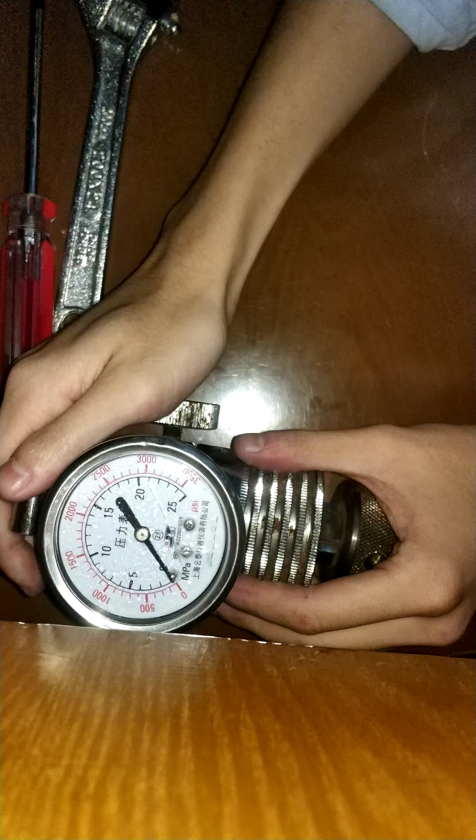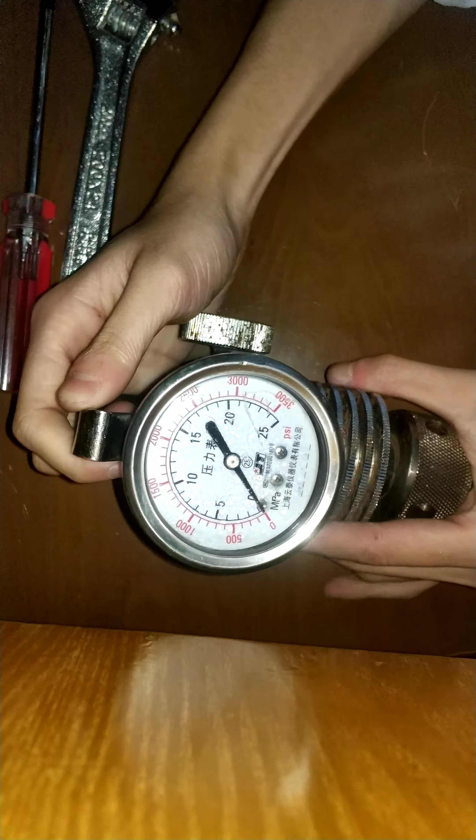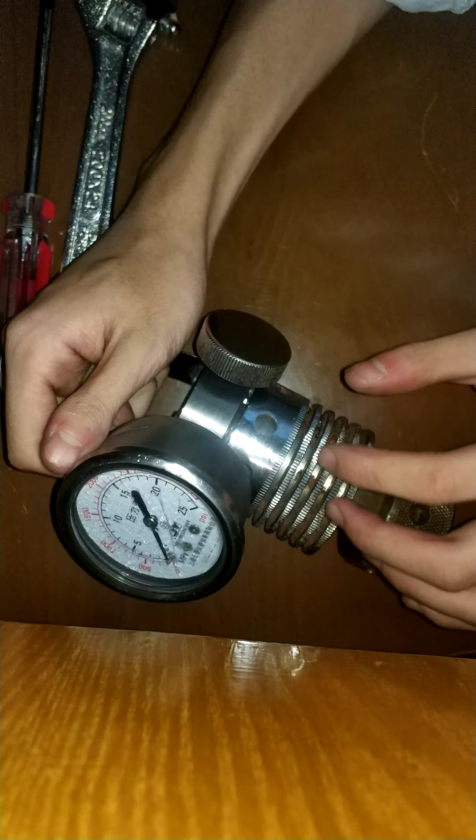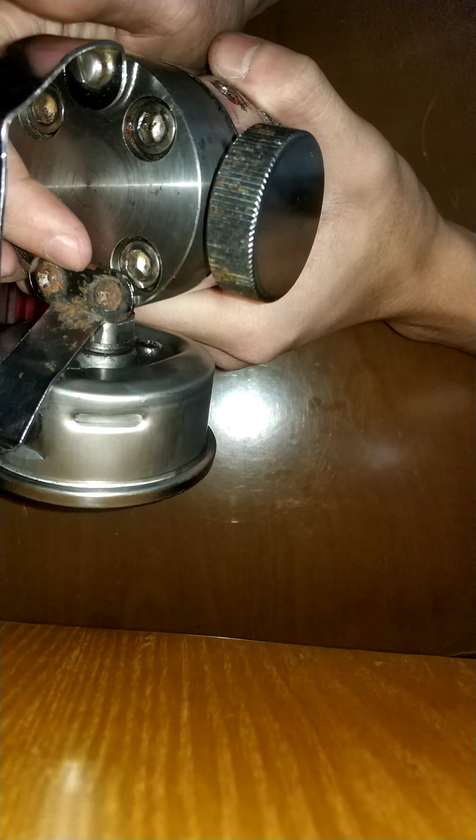First of all, please allow me to give you a brief introduction about this pressure gauge. As you can see, here is the lock nut, here is the gauge body. Inside this block, there is a non-return valve, but due to these two rusted screws, I may not be able to open this block to show you the non-return valve inside.

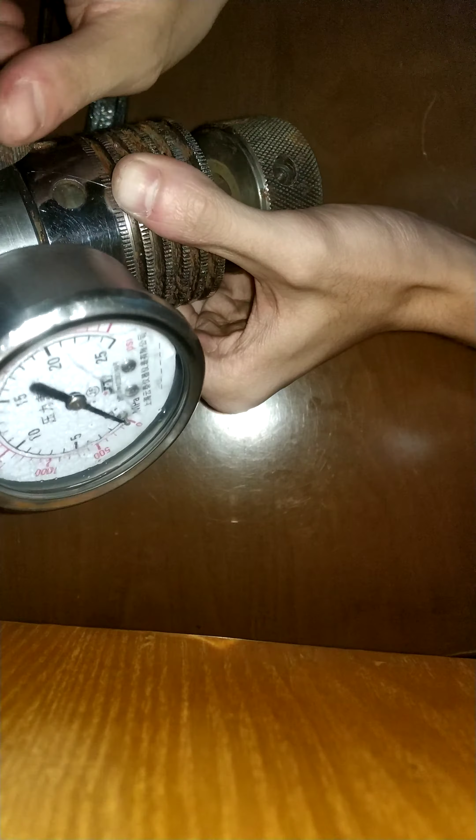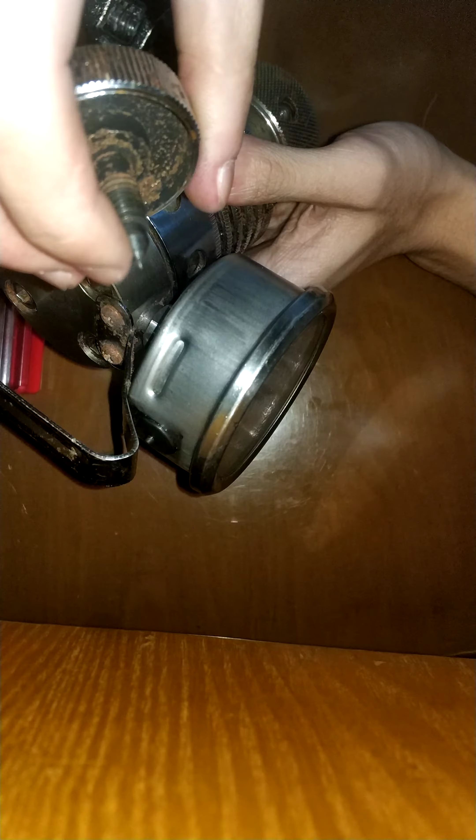This one is a needle valve. It can be dismounted from the main body. I will show you that. You see, here is a valve needle. And this one here is covered with carbon deposits. Here you see there is a hole in it.

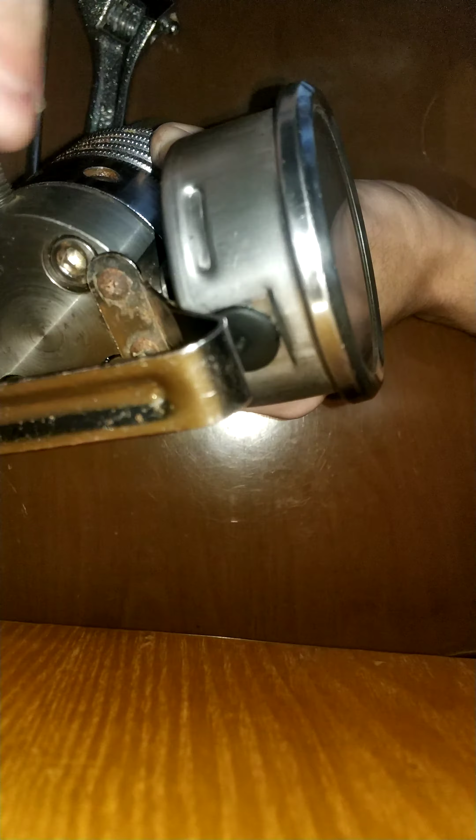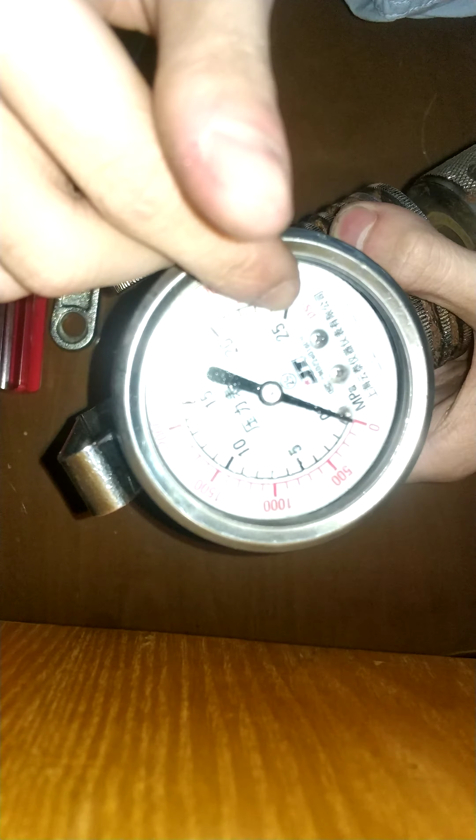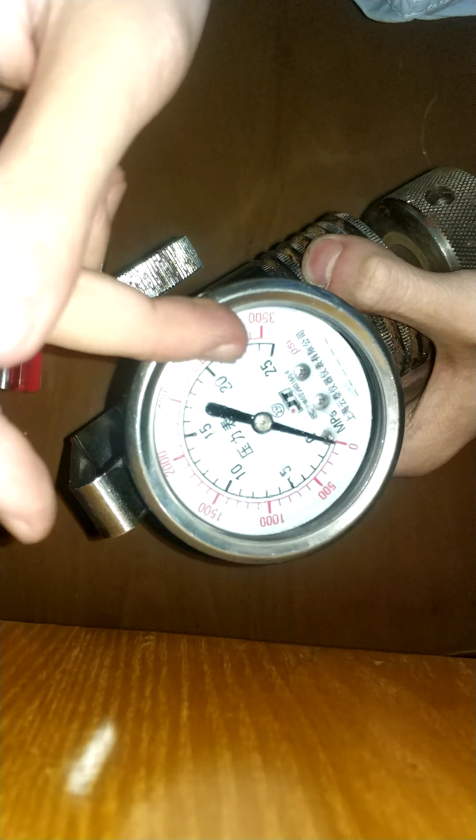The last thing is this high pressure gauge. As you can see, the maximum pressure is here, 25 megapascal. It equals 250 kilograms on a 1 square centimeter area.

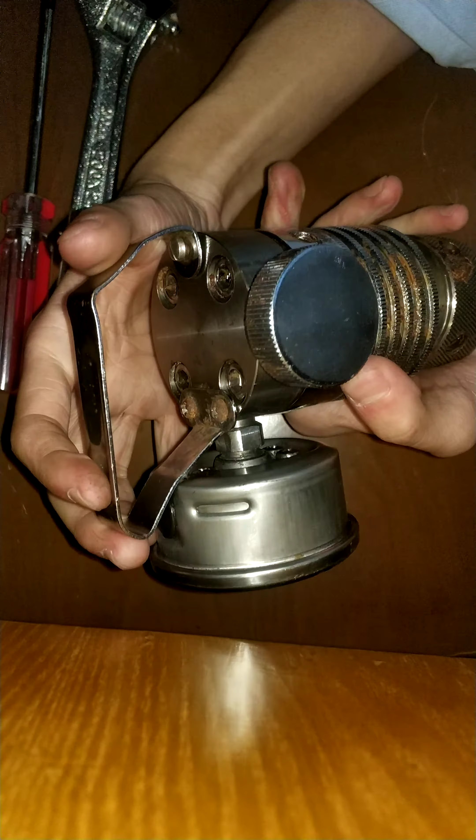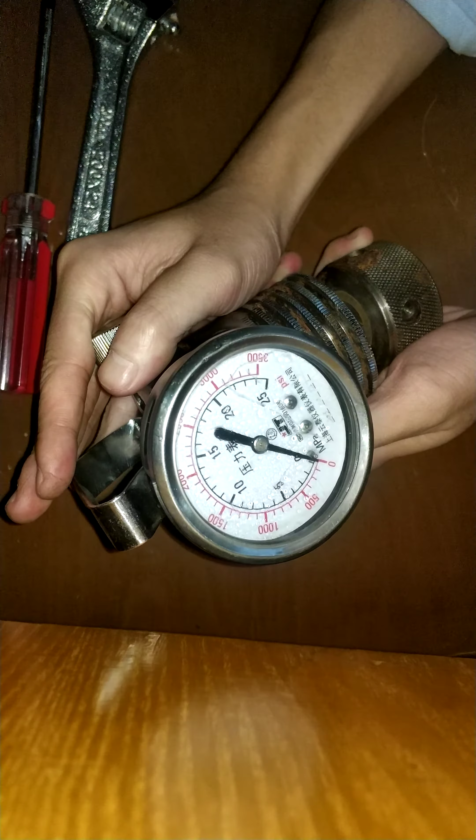So you may be curious about this gauge. What is it used for? It is used to measure the ignition pressure or compression pressure on a marine diesel engine, mostly the main engine. The marine diesel main engines are different from other diesel engines which drive lorries or tractors.

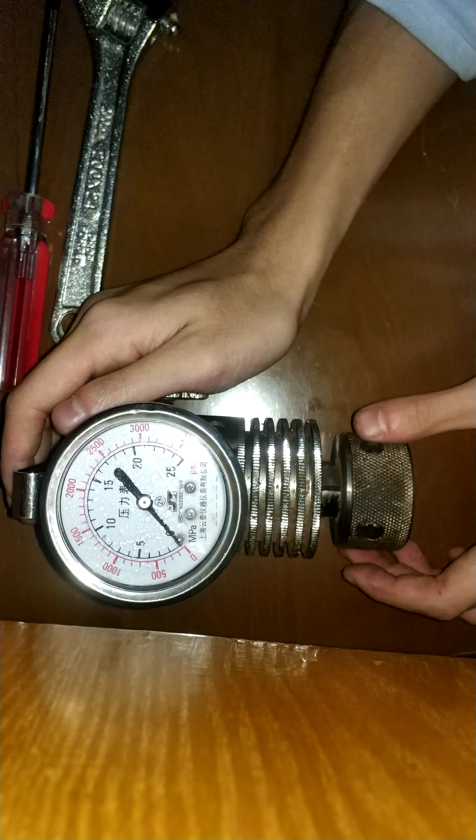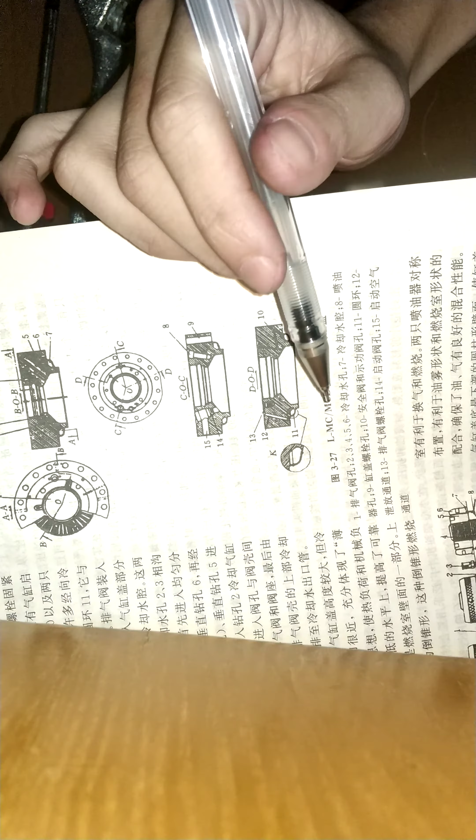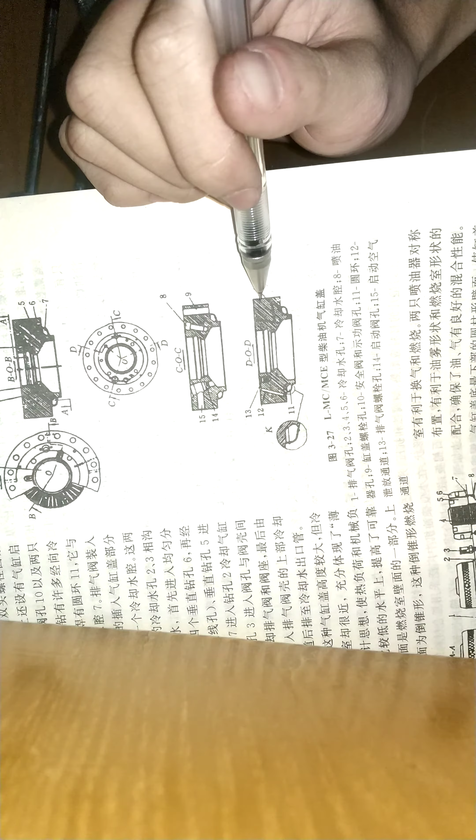On their cylinder heads, they usually have an indicator valve and an indicator cock. I will show you it. You see here, these are all in Chinese, so I will translate it for you. Number 10. Safety valve and indicator valve. Safety valve and indicator valve are usually mounted on a single block, and the block is mounted here.

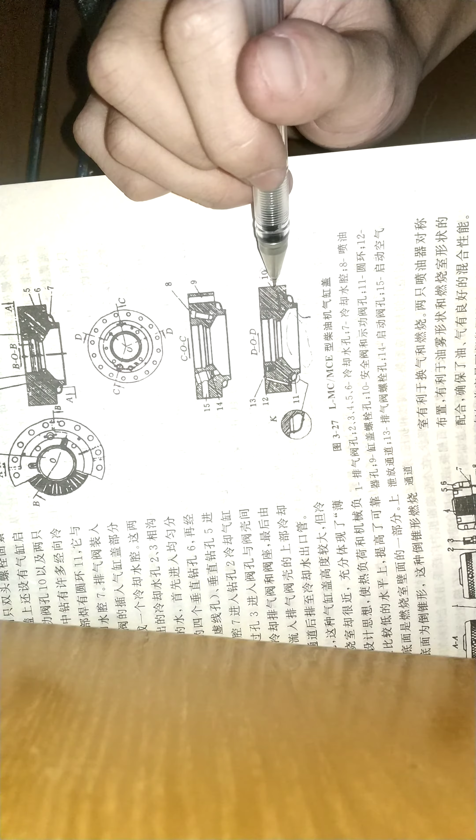Here is a combustion chamber, so the high pressure gas can go through this channel to the indicator valve and indicator cock. When measuring the pressure, we should do the following things. First, open the indicator valve to blow off the carbon deposits inside the gas channel and the indicator cock. Then close the indicator valve.

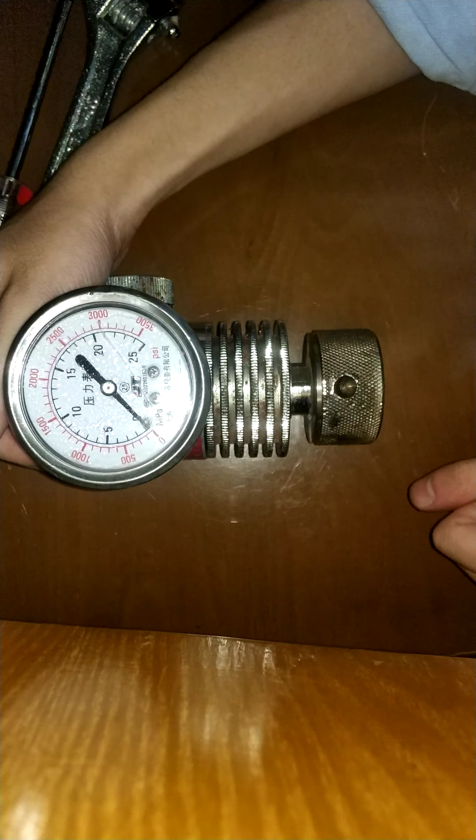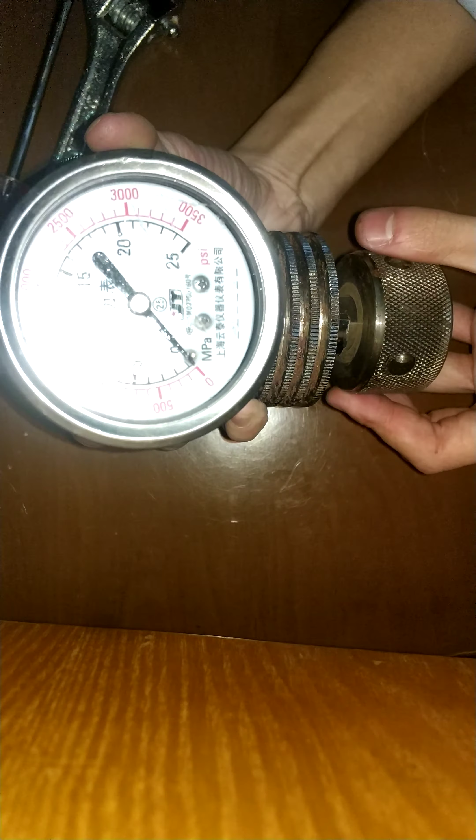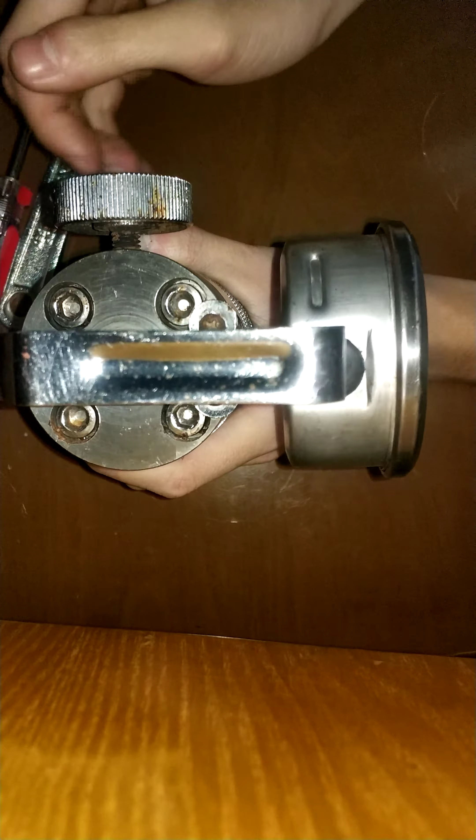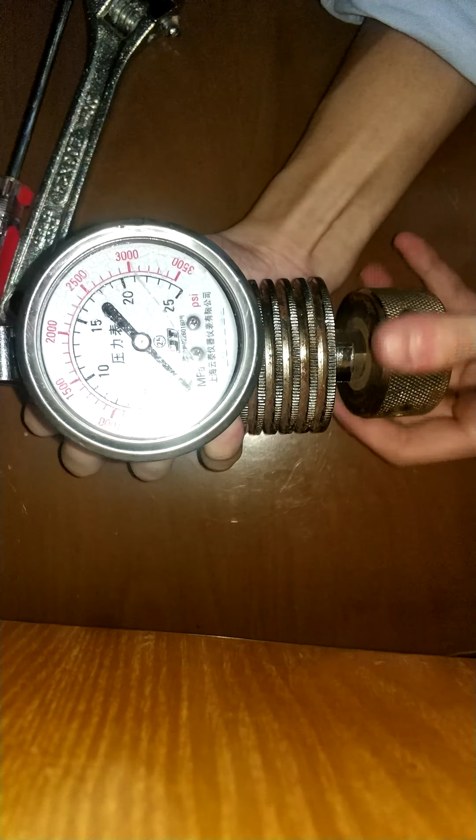Next, mount this gauge on the indicator cock by turning this lock nut. Usually the gauge is vertical like this on the cylinder head, but in order to show you more detail, I put it like this. When this nut is firmly locked,

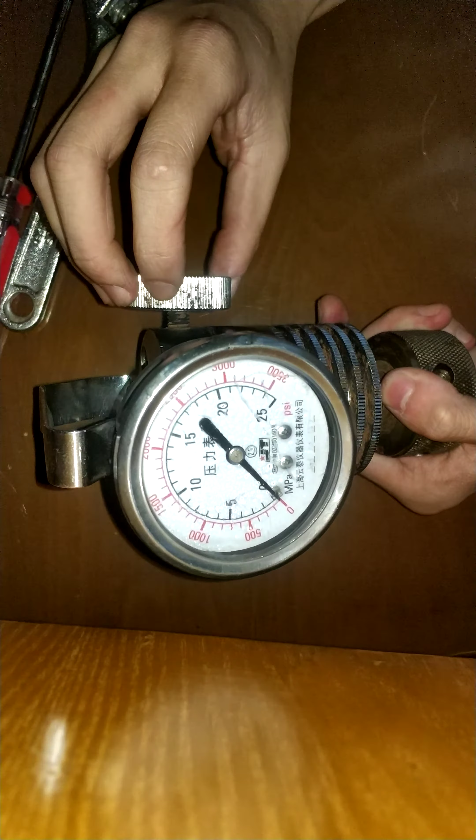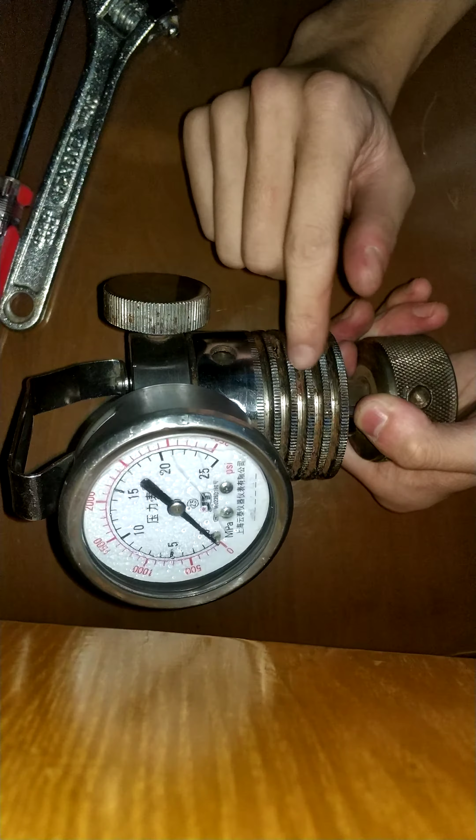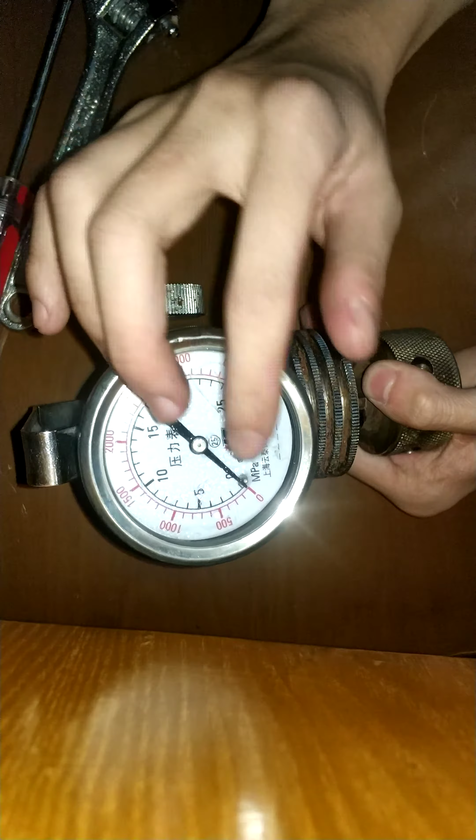we should open the indicator valve again, and the high pressure gas will go through here, through the non-return valve into this block, and escape from here because our needle valve is not closed. When we need to measure the pressure, we close this needle valve and the high pressure gas will go through this connector to this high pressure gauge, and we can read the pressure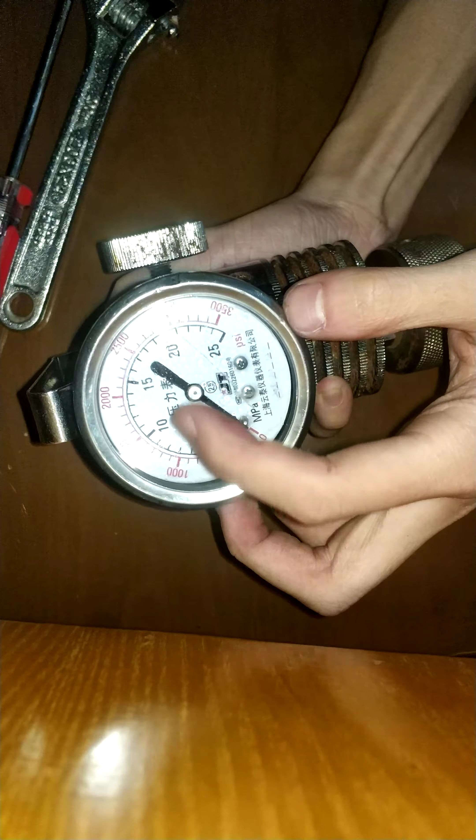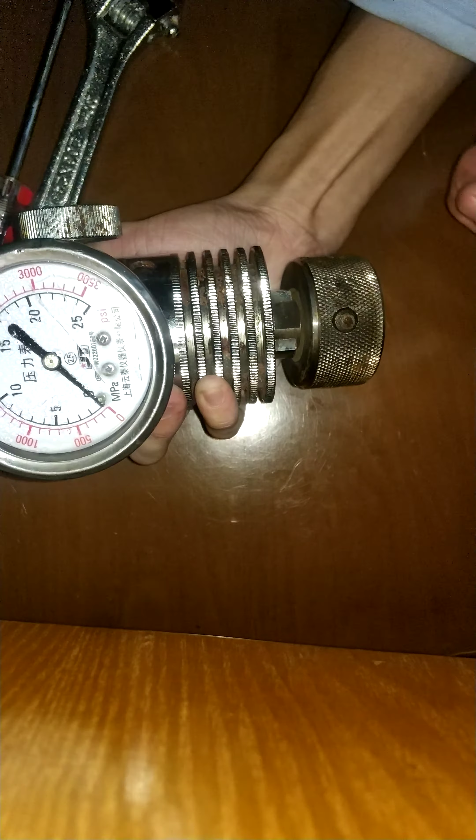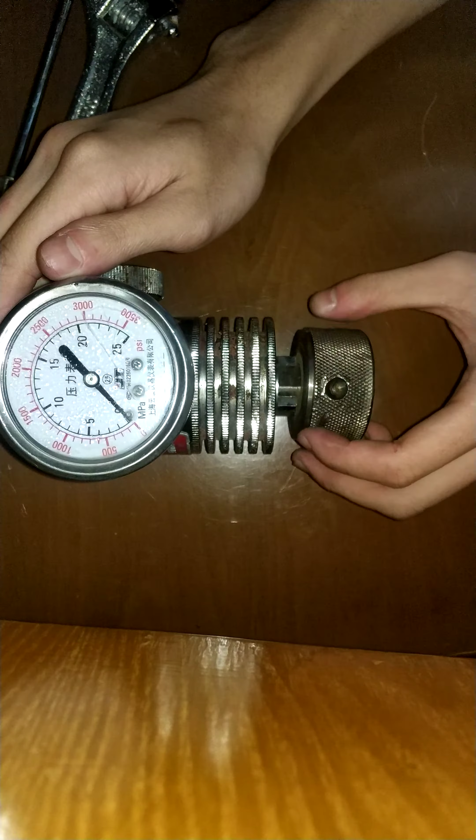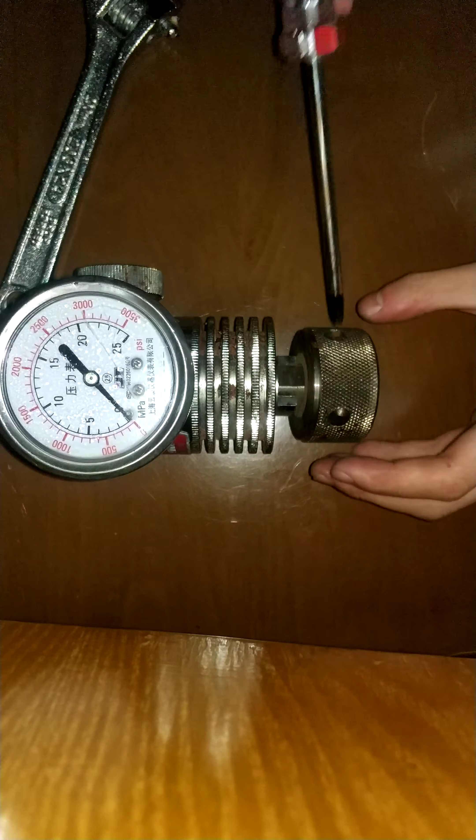on here. After measuring the pressure, we should close the indicator valve, open this needle valve to release the gas pressure inside this gauge, and you should remember not to unlock the nut with your hand because here is very hot, several hundred degrees Celsius, so we can use a screwdriver, insert it in this hole, turn it like this,

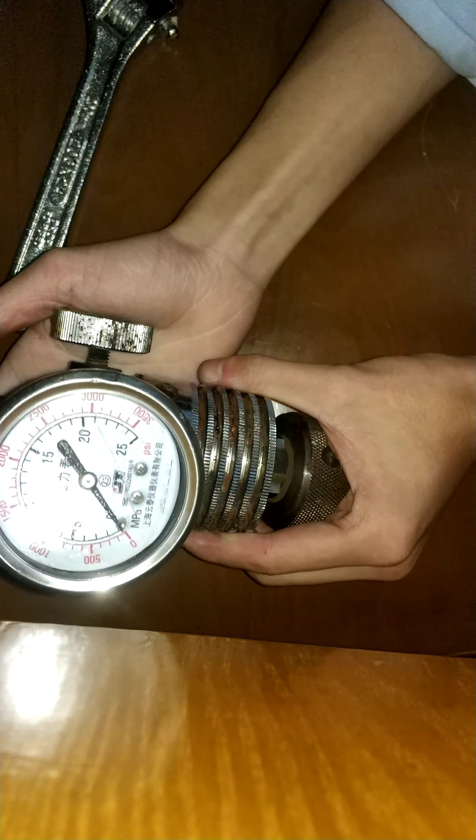and release this gauge, pull it out from the indicator cock, and we should move to the next cylinder and measure it again. So how does this work? The non-return valve is very important. I will tell you about it.

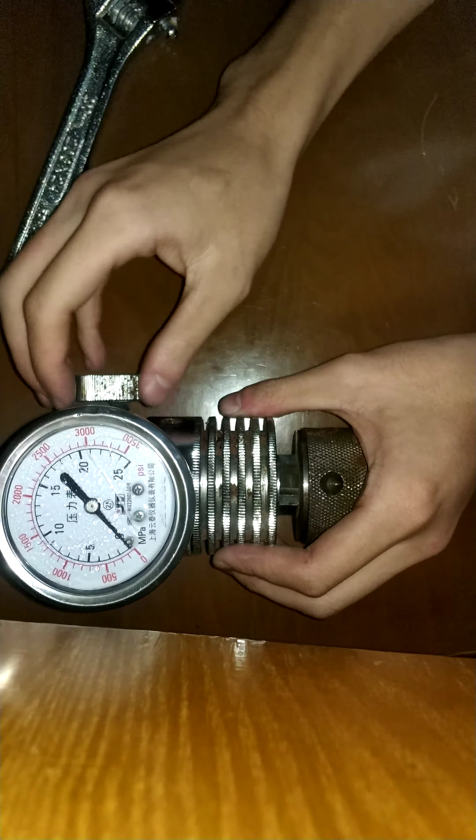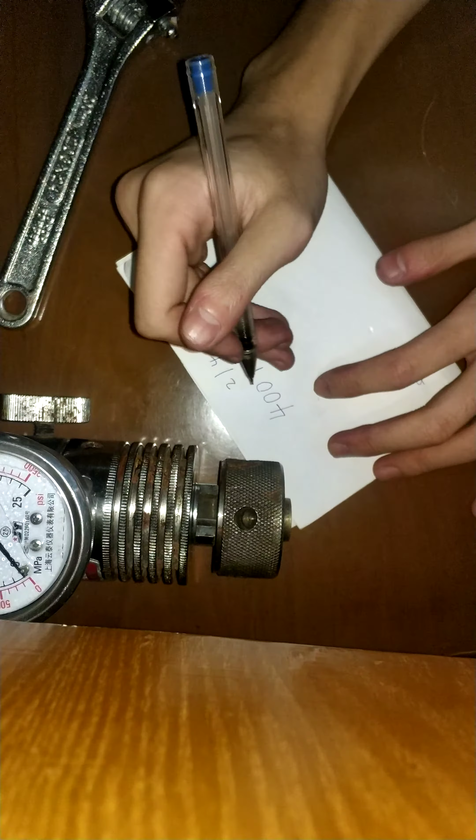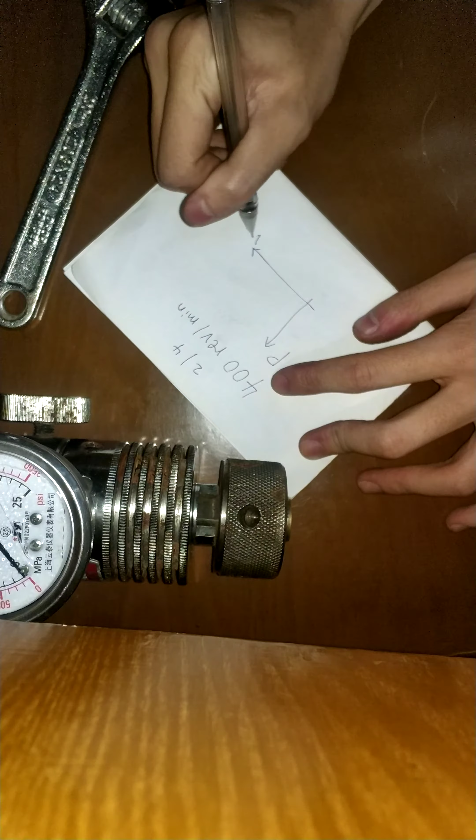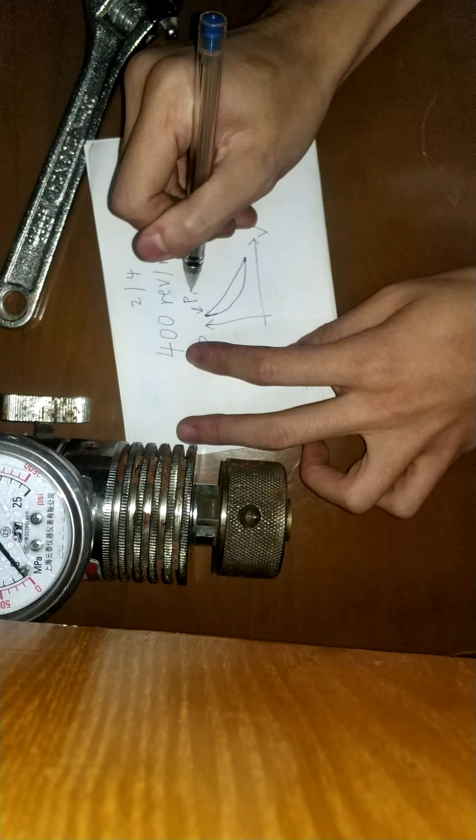First, this gauge is suitable for a two-stroke or four-stroke diesel engine which runs at less than 400 revolutions per minute. And we know that the cylinder pressure diagram is like this. The pressure-volume diagram is usually like this in low-speed diesel engines. It's not very good, but it can show some important details. This one here is the ignition pressure or maximum pressure.

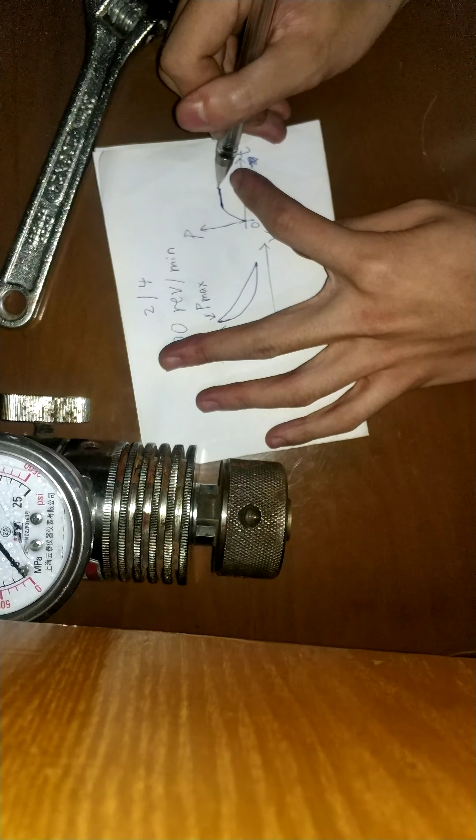Here we draw another picture to show you the pressure inside this gauge. 0. This is not volume, it should be time. Maybe like this. Hold for some time, and this. Why the pressure inside the gauge is like this, I will tell you in the next video.